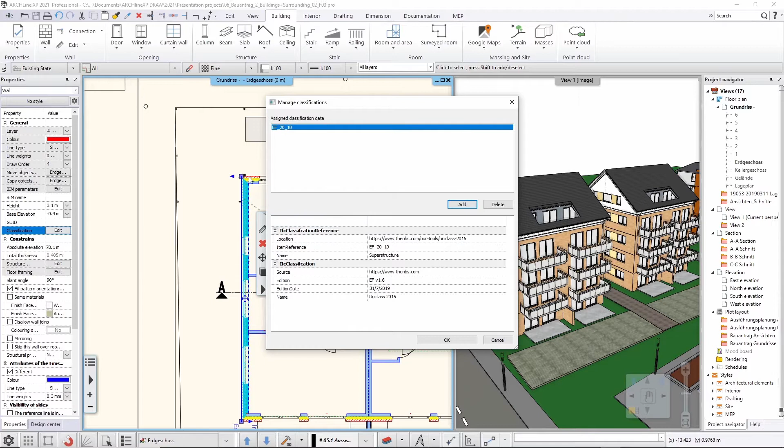In my case, I will use Uniclass 2015, and I will select something of the element types, and I will say that this wall, for example, is indeed a superstructure. So this superstructure here is a classification that, when I hit OK, I define to be a classification for this specific wall. So now I have that here.

Now there is an interesting thing in ARCHLine that is not always the case for all software. In ARCHLine you have the ability to define not just one classification, but multiple classifications for the same item. So for that, again, you can go to the classification page and say, okay, it has this classification, but I would like to add another classification, again from the database, again from Uniclass, but I can also go with another one.

In this case, this will be another type of classification, defining it to fall into this specific node with the walls, EF2510. And then when I hit OK, now it is classified as EF2010 and EF2510. So those are all the available classifications.

Should I want to define a custom one, I can at any time come here and create a new one, so I can fill in any of those. Let's say the item reference is, let's just go with the previous example, acoustic rating 2010 or so. The name should be acoustic rating 10 or 20. And I can define the source, the edition, the classification name, and so on. So when I hit OK, I have this classification as well.

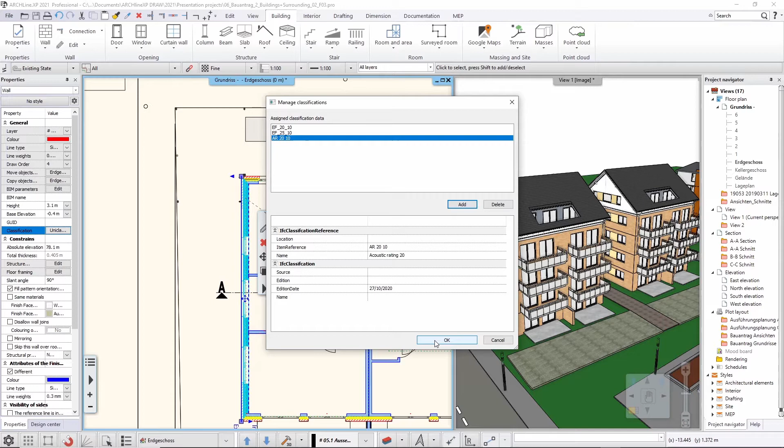So this is how you can define classifications out of the box and add them to an item. And once you have this item classified with the specific classification, you can also copy those properties, because there is an option to copy the classifications to other items, which I won't do now, but you can easily do.

Now I will just focus on this one single wall, and I will show you another example, because there is another way to extend the available classifications to your local regulations, whatever your local authorities require. You can use those classifications as well. Those are by default some sort of files, I mean Excel files.

Let me show you an example. I have a sample file here, which I'm opening in Excel. This is a simple Excel file that has two pages, the introduction and the group, and the group page contains the interesting information for me.

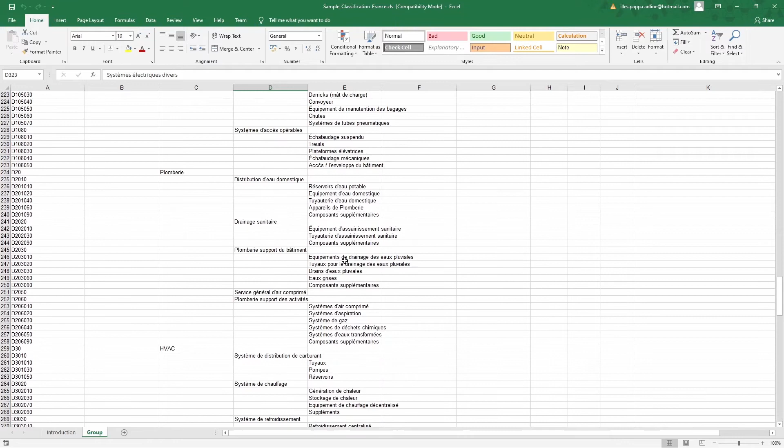This is a sample file from France, which I use today, and as you can see, it has a lot of these specific identification numbers, descriptions, values, and so on. So there's this code level 1, 2, 3, 4, 5, and so on, definitions and so on. So as it was filled up, you can actually import it into the software with this specific tool that I

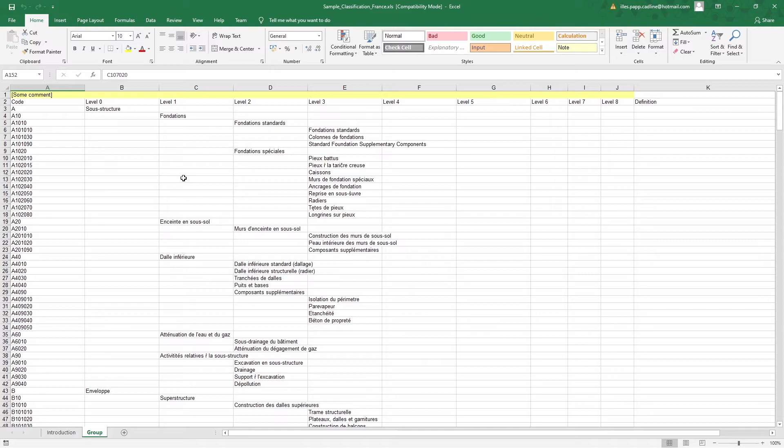will show you now. So let me just go back to ARCHLine and go to the file and options. Now in options you have this open and save page, and here you should scroll down until you can find this IFC classification, import database from Excel files. Now this is what I need. I go here

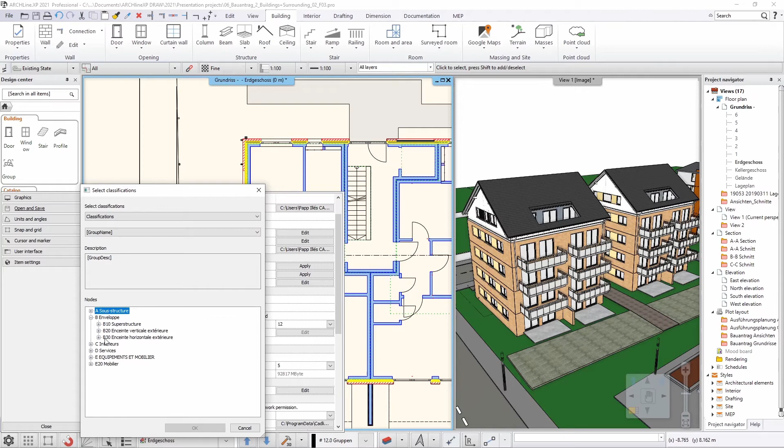and I will just open up a classification that I saved here in my library. This is the sample classification file that I'm going to pick up. And this is what I select, and I hit OK, open. So now the software opened this and digested it and converted it into a classification table. So from this point on, I have the option to select that one that I have opened up, and I can go and select any of those classification types from this specific file.

So it gives a lot of freedom overall and internationally. So whenever you would like to use other classification types than the software is shipped with in your country, you can do that. You only need to obtain this classification Excel file, and then you can import it and you can classify those files. Now, as a final touch, let me show you how it looks when you export the IFC file out of this model.

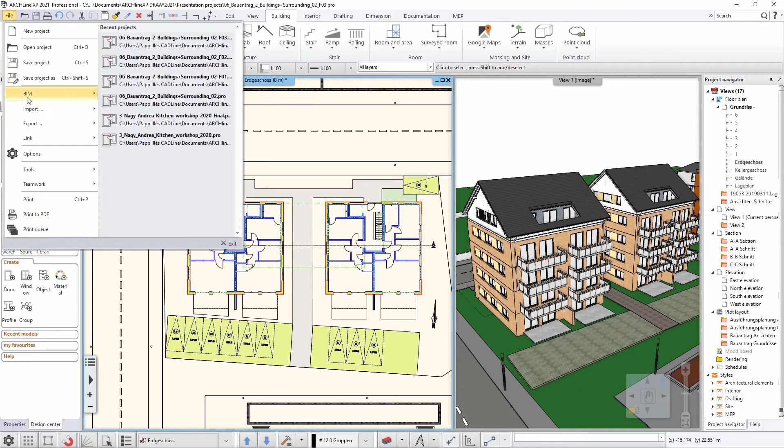So now I have this full model, and I will only focus on this wall, but I will export the whole model. So I go to the file and export, and I'm going to export an IFC file. Now this will be something that I will save into this 2020 folder. Let me just create a new one. This will be IFC. Now I'm going to save this into this one and just say this is the name of the original project. Something like this, and this will be the IFC export or something like that. So let's just save it.

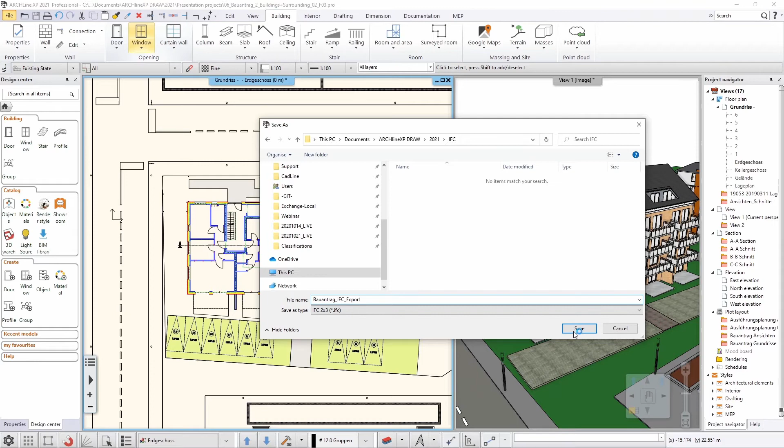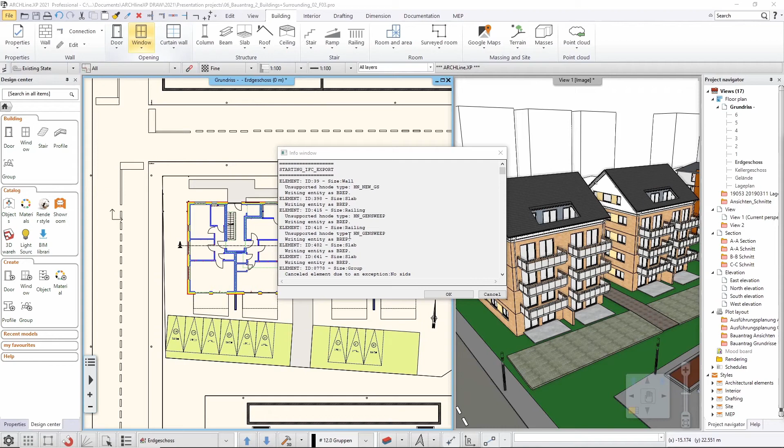And I'm going to go with the default settings. I don't change anything. I just hit OK, and I wait for the result to appear in an IFC file. Now, in case of a larger project, it might take a while, but in the end you will see an info window with the report. Whatever was exported will be listed up here, and then I hit OK, and I can load this up in a viewer. I actually have this viewer on my computer.

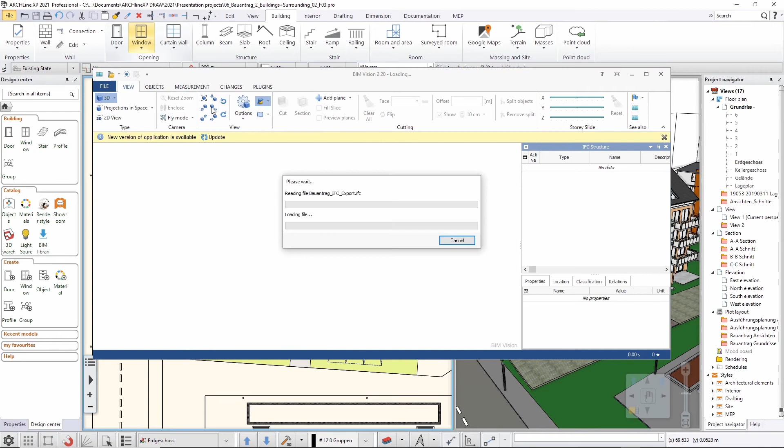It's called the BIM Vision application. It's a free application. This is what I'm going to use today. And I'm going to go and open this IFC export file that I've just exported. So it loads up in the viewer, and what I'm interested in is that information that I used for the classification. So this is the whole area with all the rest of the buildings and all the walls and everything

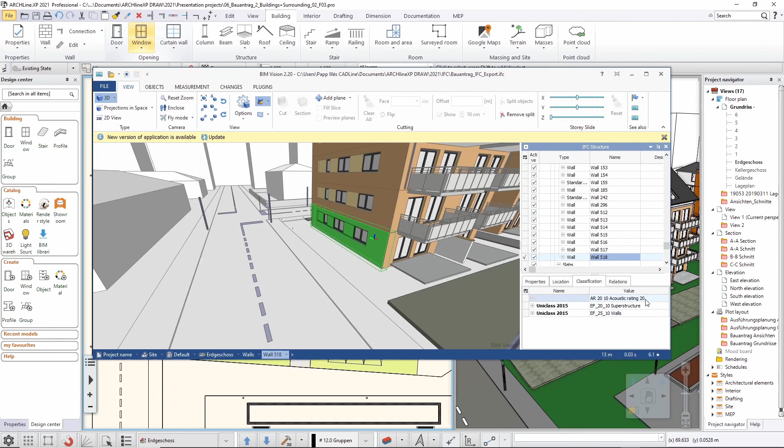else. I'm just zooming in to this part of this building, zoom into that specific wall and select that specific wall. And this is actually wall 518 in my specific case, and then all I need to do is to go to the classification, and I will see the two Uniclass classification items that I classified it as a wall and the superstructure. And I also added my own custom acoustic rating classification tab, which appears here.

So this is how you add and change the classifications of items, and this is how it is represented in a third-party software as IFC content, as BIM content.